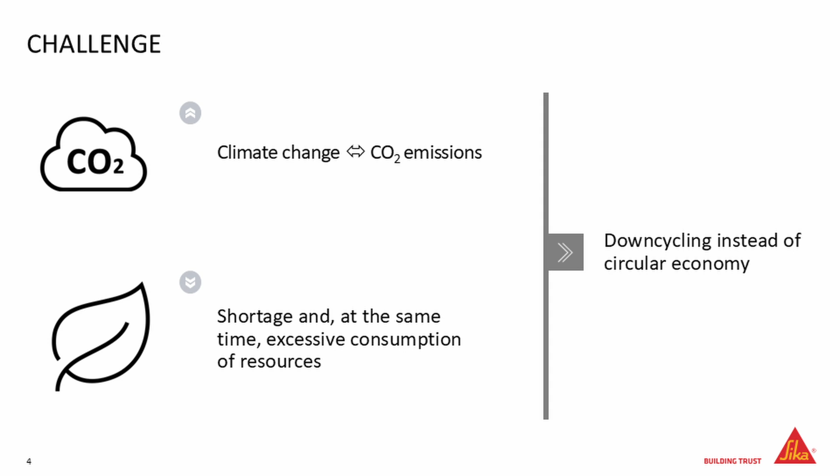When we look at many countries, we see a shortage of materials that we need for concrete, especially high-quality sands and aggregates. On the other hand, when we look at what we do with our concrete structures when we don't need them anymore - we tear them down. But in many countries of the world, we just send that to landfills. I think we could also see that as a raw material and try to think of how we can reuse this waste instead of just treating it as waste. So that's the situation at the moment.

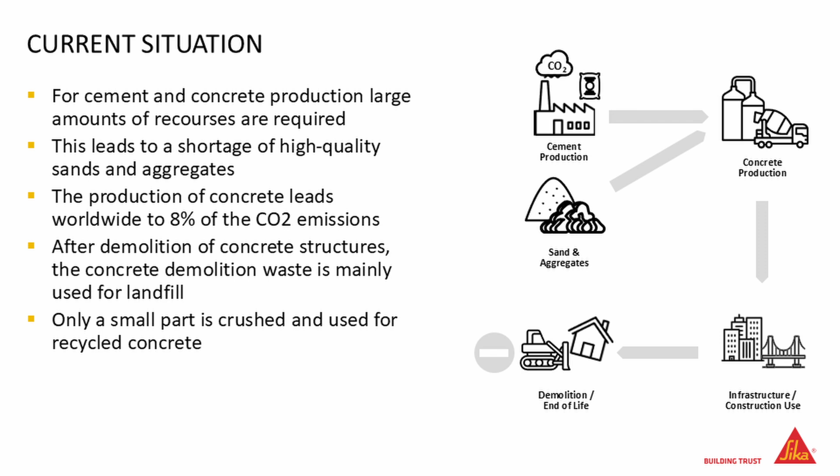The cement production is quite CO2 intensive. That's how it is. Of course, the cement industry is working heavily on reducing that. We need a lot of sand and aggregates for concrete production, but at the end of the use of these buildings, it's really the end of life of this building material that is so CO2 intensive. This is the sand and the aggregates - this is the major part of the concrete.

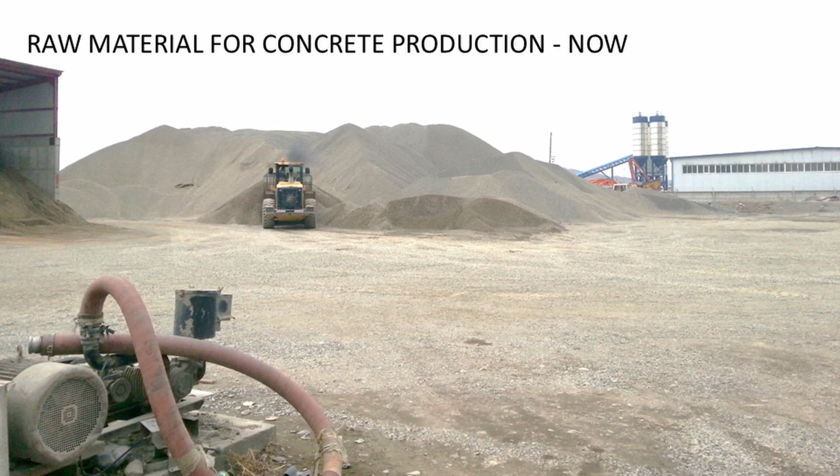Roughly 2 tons per every cubic meter is sand and aggregates. That looks quite nice - in many countries we still have enough resources of that. But when you look at what we need worldwide, you see on the left side the cement production - it's roughly 4.2 billion tons yearly of cement. China has a major part of this, and you see it's now flattening a little bit because of China. On the right side, you see the annual production of aggregates - this is 41 billion metric tons of aggregate needed every year for concrete production.

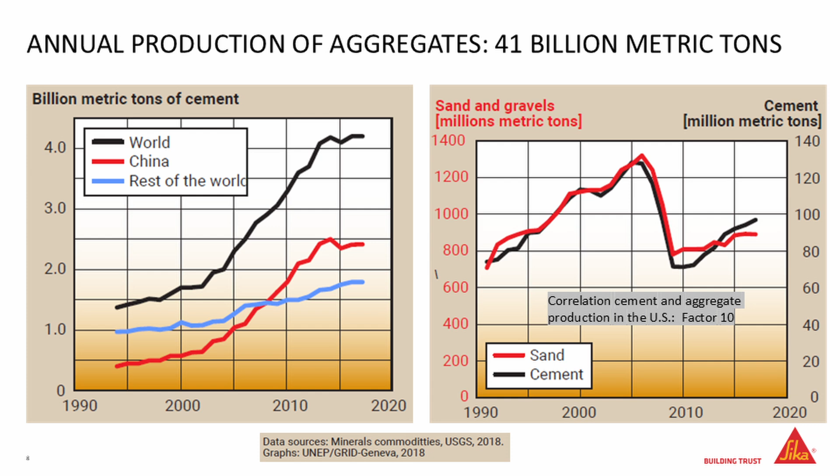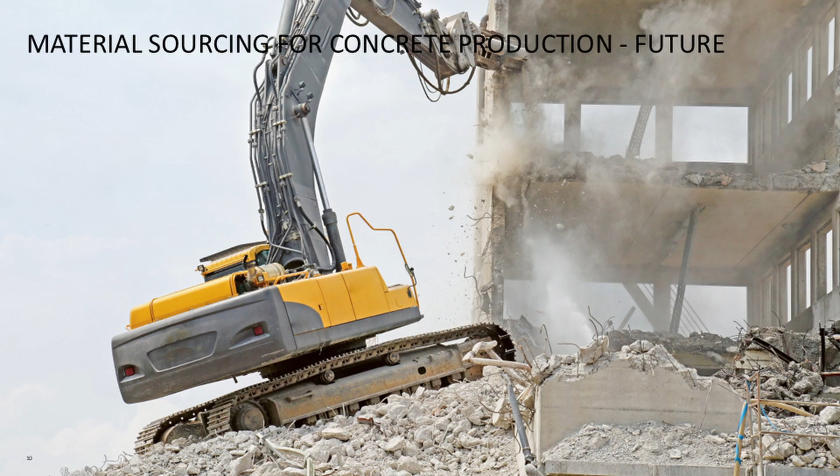Many times we just look at the cement because this is so CO2 intensive in production, but the transport of aggregates is also a very big point. When you Google a little bit, you find a lot of articles about the scarcity of especially high-quality sands. That leads to a lot of transport, because when you don't have the right quality of sand in your country and you need to build a lot of concrete structures, you need to import sand. And what does that mean? A lot of transport, and that's also very CO2 intensive. So what could we do? We could also take a look at what is there and maybe use the old concrete that we don't need anymore as a source for new concrete production.

When you look at the world and try to find out how much concrete demolition waste is available, it's really hard to find figures. You often find figures about CDW, construction demolition waste, and this includes everything: bricks, wood, steel, and concrete. Then you can look at these countries to see how much of this material is really reused, and the figure is quite small. So there is a huge potential.

When you compare the number that's somehow available, 600 million tons of concrete demolition waste, to the 41 billion tons that is required, this is ridiculously small, but I fully believe there is much more of this than we know of. We know a lot of countries have a lot of space, and they use that space for landfill, for dumping old concrete. But I think there is a big potential.

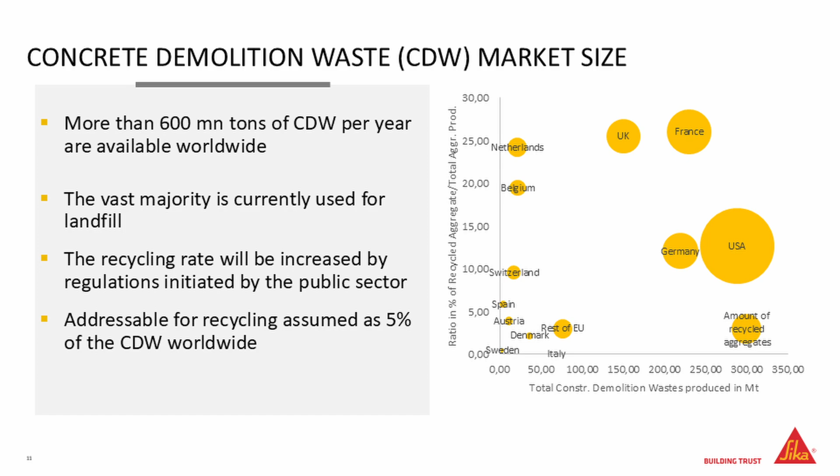For the next slide, I have the kind permission of the city of Zurich to use their materials. So this is how typical construction demolition waste looks like in the city of Zurich.

You see there is a certain part of wood, some metals inside, some glass, some steel, but only a few. The biggest part is the concrete demolition waste, and it's mixed material. This mixed material contains bricks and cementitious material. So the city of Zurich wants to reuse this material, or most of it, again, and this is a big challenge.

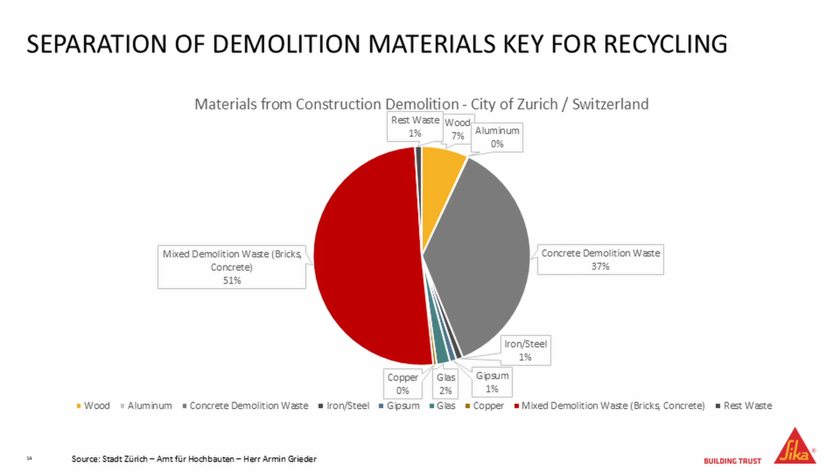But it's still double the target amount, and the target is 2050. It's a long time away, but you need to make the incentives now to get there. And also the CO2 emission per citizen should be reduced to a maximum of 1 ton per person per year. This is, of course, everything, but the construction of the city also has a big impact.

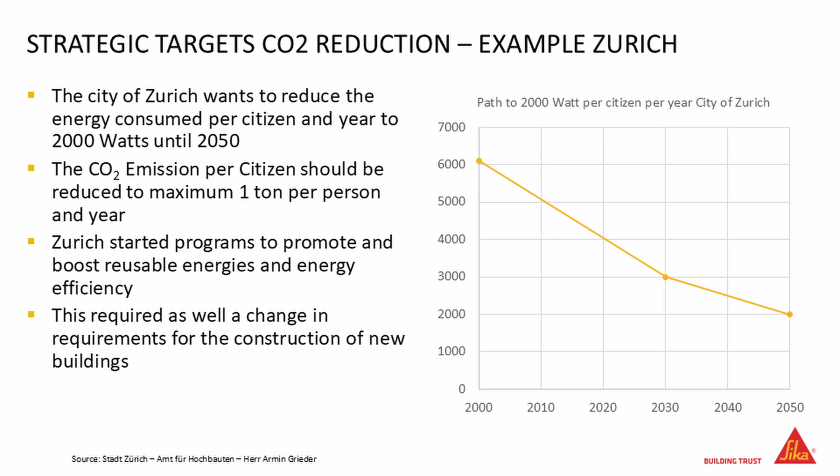Every building the city constructs is part of that CO2 emission, and this needs incentives. So one of these things is to make an incentive for contractors and concrete producers to go in a more circular way. This started already around 2000, when you first need to have standards for this.

Concrete production is highly regulated, and if you want to change from natural aggregates to recycled aggregates, you need a standard for this. You need to somehow implement quality control, and that is why in Switzerland there is this regulation for recycling concrete and also for recycling aggregates. Basically what's in there is regulated applications for concrete using recycled aggregates. By the way, recycled concrete in Switzerland means that at least 25% of the aggregates come from recycled concrete.

So it's not just 5%, it's roughly 500 kilograms per cubic meter of concrete that has to be minimum recycled aggregates. And of course you need to regulate the ingredients and limit certain things, because this can impact the strength and durability of the concrete. Also, when you extend a certain volume fraction of recycled aggregates, that has an impact on the E-modulus of the concrete. So there are different classes. This is very important for all specifiers and engineers, as a basis that is needed.

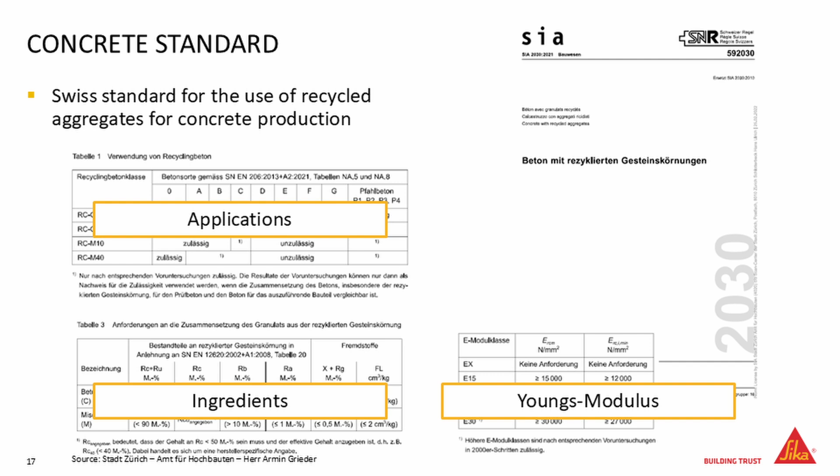Reinforcement is really something I want to emphasize here, because we talk a lot about cement and reducing cement. I think as engineers we also have the responsibility to think about the reinforcement, which reinforcement do we really need, and what do we just put in there because it's good to have it there.

This also leads to a large CO2 footprint, and now we have a lot of sensors available on the market that could monitor the behavior of our structure, and maybe that can also lead to reducing a little bit our safety factors as engineers. But this is just a side remark when I look at that figure.

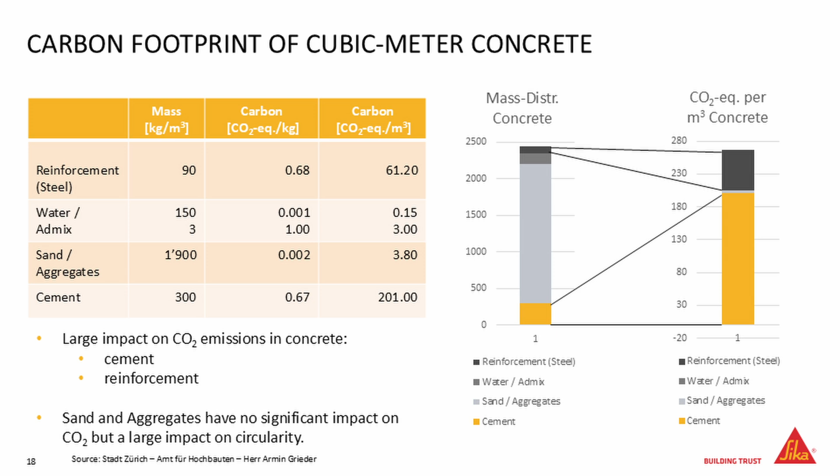So coming back to the city of Zurich, what did they do? They said, okay, we look at the cement, and we now look at alternatives to a pure Portland cement. When we look at the CO2 equivalent of a composite cement, we see we could save a lot of CO2. A CEM 3B has a much lower value in CO2 equivalent per kilogram than a Portland cement, and with that, they could reduce the CO2 footprint per cubic meter of concrete significantly.

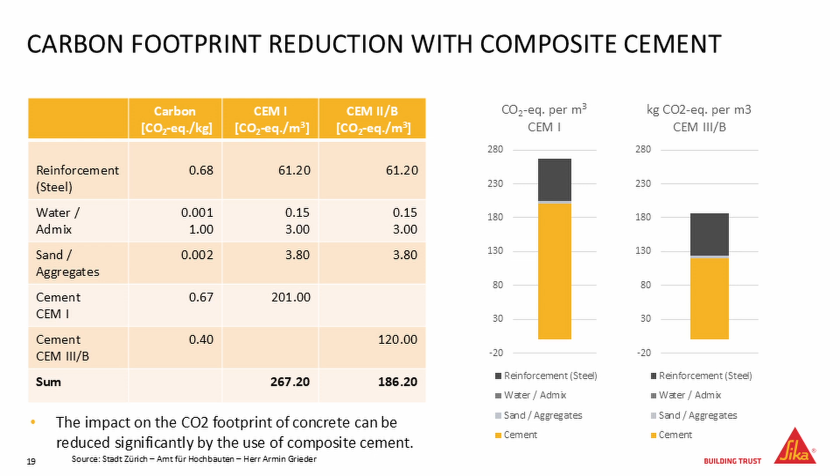So what did they do? Basically, they said we want to tackle these two points, circularity and the CO2 footprint. And how can you do it? You need to specify this. So the city of Zurich said in the year 2002 that all public buildings need to be built with recycling concrete, since 2002. And since 2015, all new public buildings need to be built with recycling concrete containing CEM 3B. So that is a must. And that resulted in some pre-tests done with contractors, with recyclers.

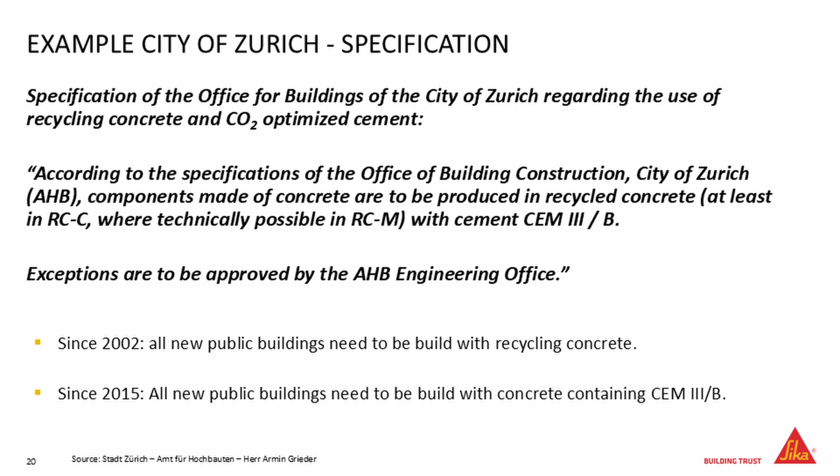Because you need to make sure that you have enough material available when you specify this. It needs to be available. So some recyclers around Zurich needed to be involved, and the contractors and the ready-mix producer to produce a certain quality of that material. But the decision was made very, very quickly, because it was already in 2002, and a short time later the first buildings were produced. For example, this is a public school building in Birch.

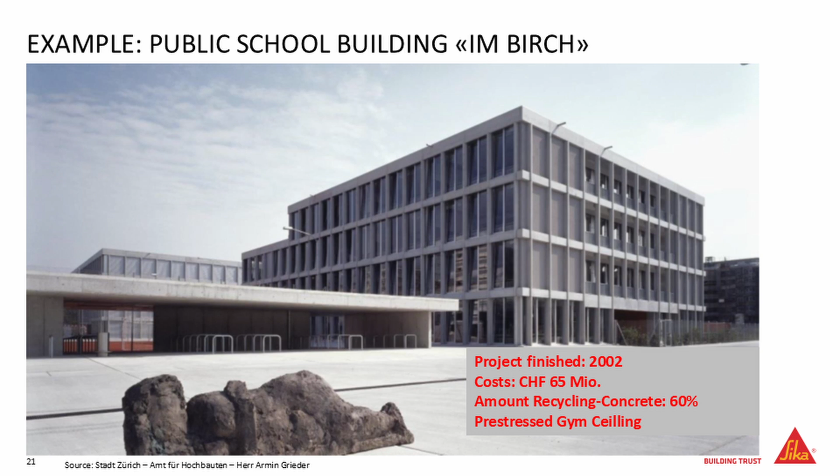It's built in 2002, and the recycling concrete content was already 60%, also used for pre-stressed ceilings there. And it's still standing today. One of my daughters is going into that school, so it's all good. It's all working. There are other examples. A public housing estate in Zurich, built in 2006 with already 75% recycling concrete, also used for earthquake resistance walls. So this is also possible.

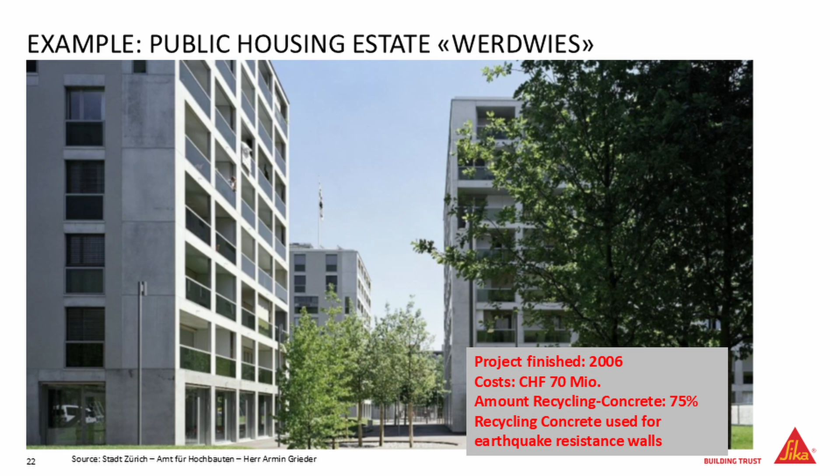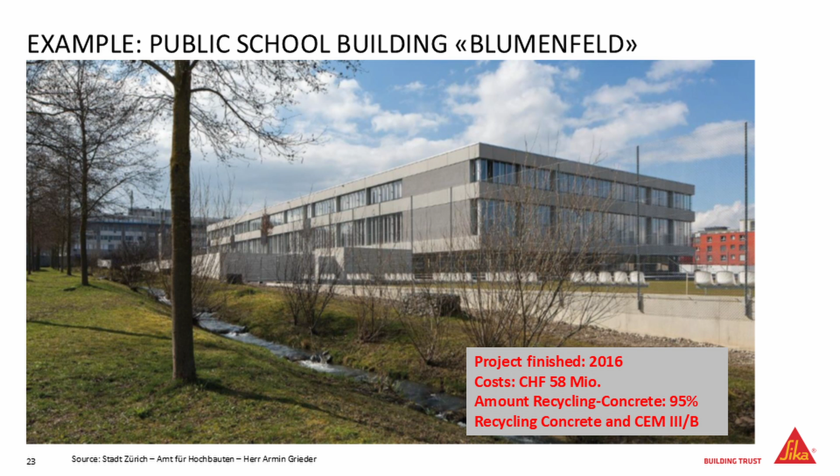And then another public school, also in Zurich, there the amount of recycling concrete is already 95%, containing the blended cement CEM 3B. So that shows that this is possible, and you need to start somewhere. I always say it, walk the talk, and you need some people who just take ownership and do something. I think we have enough good engineers in the world who can judge the risks for such a material, and we have now a certain need to do something.

There are some limitations for some applications. That's why we still have some normal concrete there, because you cannot use recycling concrete for everything. But it's 80-90% used, and 80% of this is used with CEM 3B. So that has a big impact. It's not just a specification, this is really done in Zurich. That resulted in 30,000 tons of CO2 reduction in 2022, which equals 30% of the CO2 released due to building materials. So that has a certain impact.

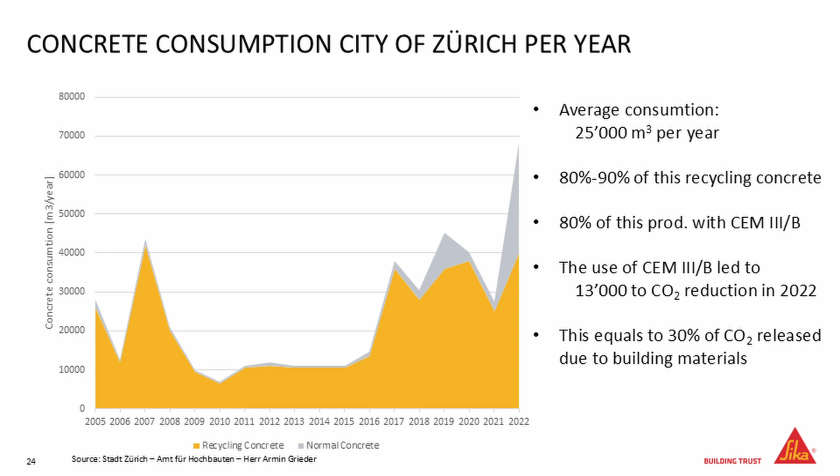So now I want to come to a process, because you still have these peaks with gray material, and this is the standard I showed you. The recycling concrete is not allowed for every application because it has some limitations, so I want to introduce you to a process that eliminates these limitations or disadvantages. One of the disadvantages of the recycling material is that when you crush concrete down to several parts, you can classify this according to size - you can make your sieve curve for the concrete.

That is fine. But the main difference to a normal aggregate is the porosity, because you have an agglomerate of aggregates and cement stone, and the cement stone is highly porous. That means you have a completely different water absorption - the water absorption of this recycling material is by far higher than primary aggregates, and this causes a lot of problems. For example, when you use a lot of this material, you need more water in your concrete. When you put more water in your concrete, you have a strength problem. So to maintain your strength, you need to increase your cement content. That leads to a circular aspect - you can say, okay, with recycling concrete I have a circular concrete, but your CO2 footprint can be slightly higher than a normal concrete. So why should you do it?

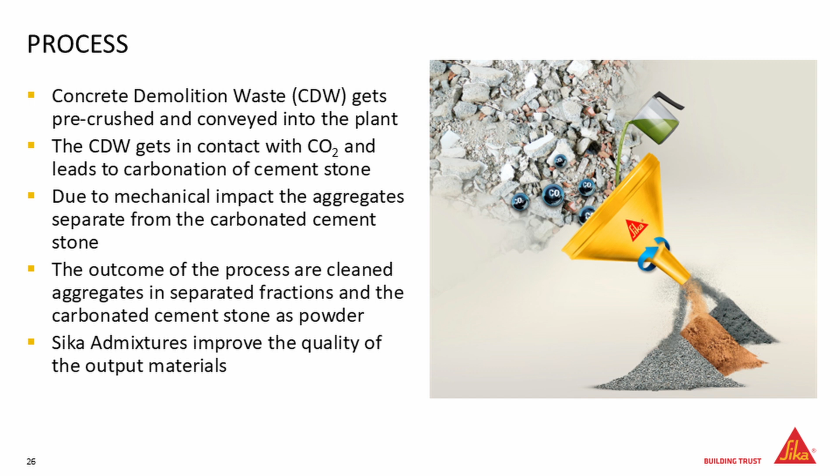So at the end of the process, we have the aggregates, we have the sand fractions, and we have the separated cementitious parts in a powder. And that is basically the outcome of that. And again, why do we do that?

This is because we want to reduce the water absorption of these aggregates. And by reducing the water absorption, by cleaning them, we can open this field much more, so that everybody can use recycling aggregates to produce concrete with a lower CO2 footprint.

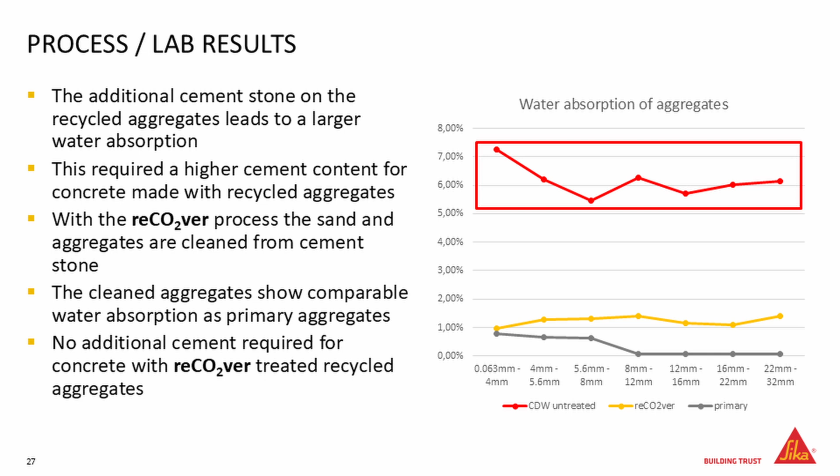That was the idea. And then the idea is that after the demolition, we take the material, we process it through the reCO2ver process, and can bring it back as primary aggregates and reuse it again.

The other story is, you see some more there, that we also can introduce CO2 into the process. And this is the second aspect, the CO2 and reCO2ver.

Because when you grind, or when you put the friction and you have this powder, this can be very fast and easy carbonated. So the CO2 reacts really fast with this powder, so we can bind CO2 in this process as well.

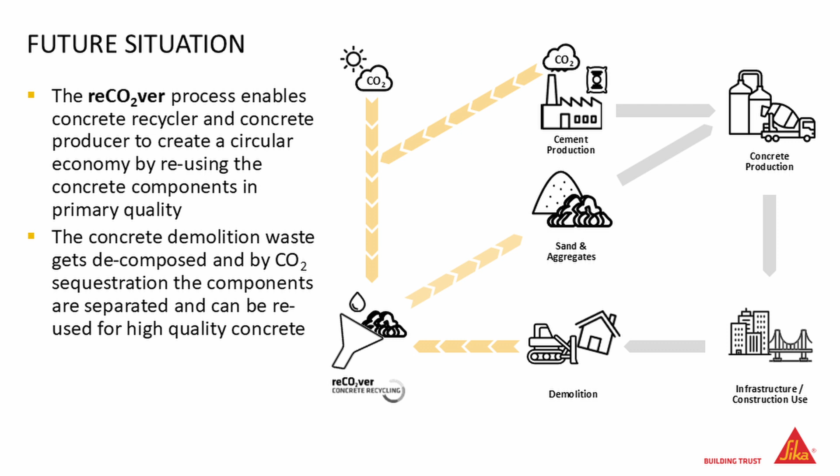So we can have the circularity aspects by cleaning the aggregates from the cementitious parts, and we can have the CO2 sequestration part, which is much, much faster by combining it with a grinding. So basically we can create with this a circular economy of concrete.

We are saving natural resources because we are taking out the aggregates again from the concrete. We can use this process for CO2 sequestration, so bind CO2 into that. And with that, we can reduce the cement fraction of the recycled concrete, and we can also use the powder to partly replace cement.

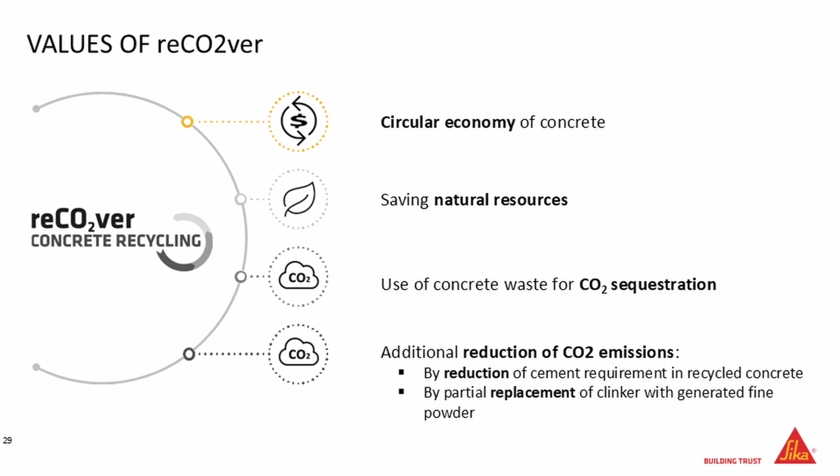So that maybe sounds nice, and you would ask, okay, does it really work? So we ask ourselves, does it really work? We had to show it also on a larger level, not only in the lab, that this works.

We talked to recyclers, and they said we are talking about big amounts, and also one thing was the fluctuation. So if I tear down a normal house that is maybe 80 years old, and the next day I have an infrastructure, an old bridge that's maybe 30 years old, this is not the same concrete. So what do I get?

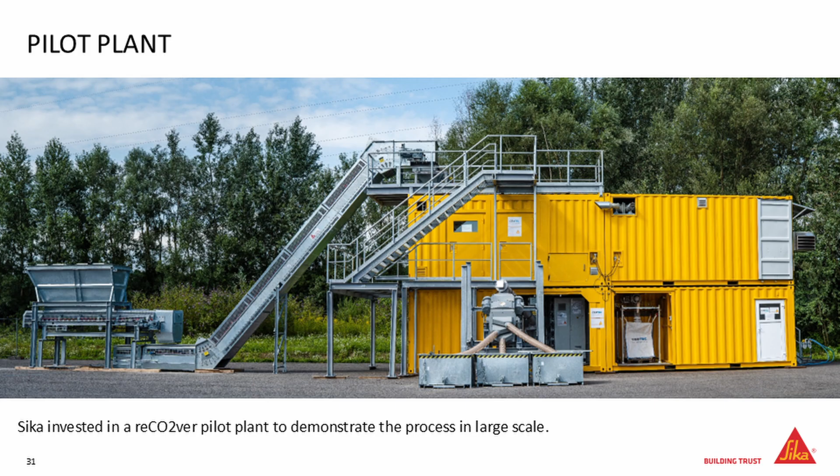And so that was the reason why we installed a pilot plant, and we installed it not at the Sika facilities, but at a recycler, because we really wanted to see how this process behaves with real material, real recycling material. So here is a short video about this pilot plant, so you can see how it works and what are the parts of this plant.

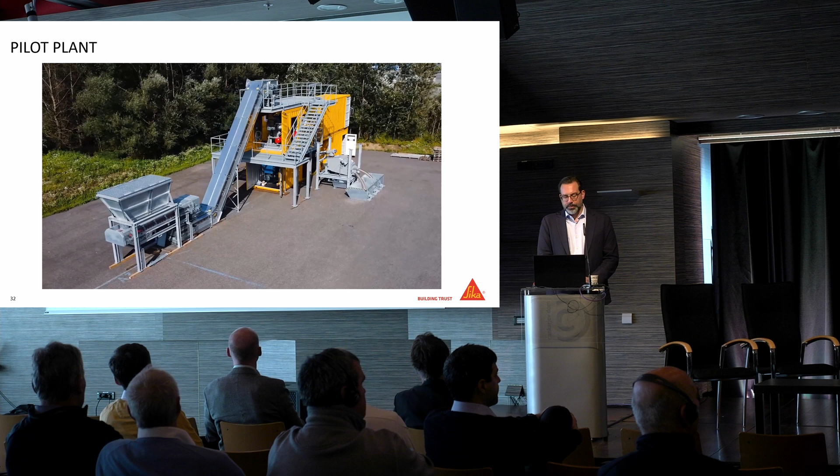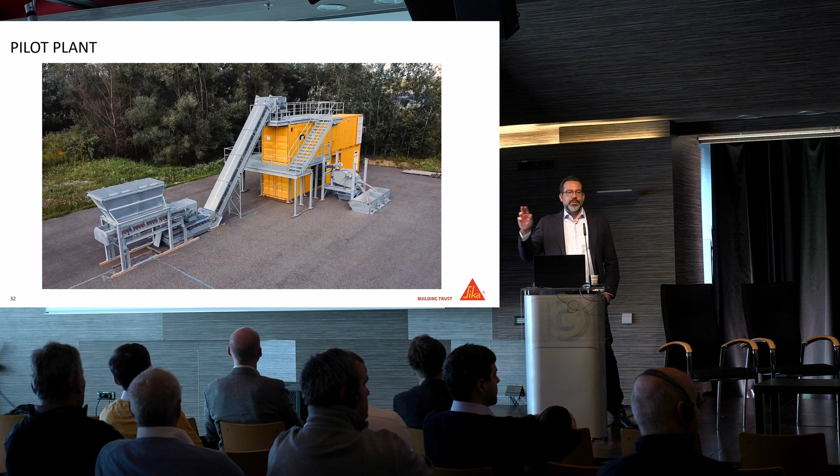So the idea was first that we install a kind of mobile plant, in four shipping containers. And the idea was that we bring it from customer to customer, but in fact we only moved it once, and we saw it's much easier to bring the concrete demolition waste to the plant than the plant to the concrete demolition waste.

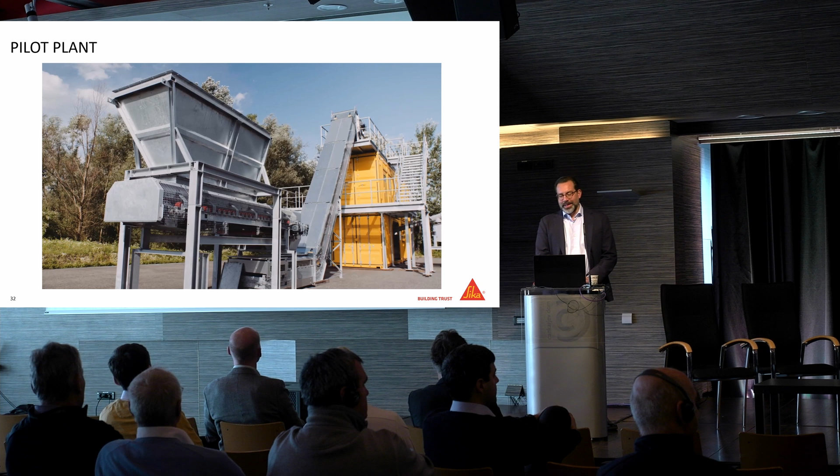So what you see here is the hopper. This is where the material gets filled in. This is an example of pre-crushed concrete demolition waste, you see here it's pre-crushed down to smaller than 40 millimeters.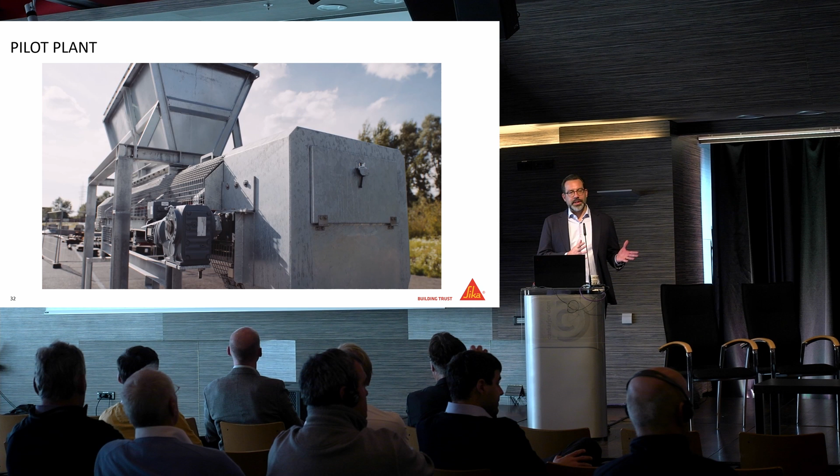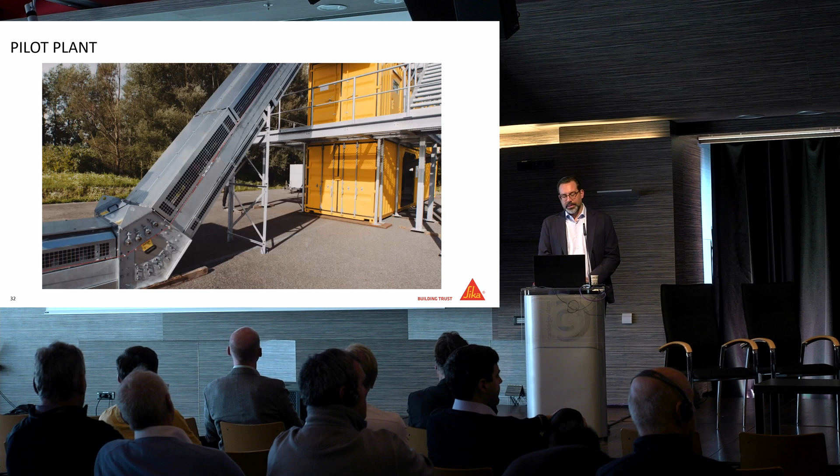This is how it's done in every case because of transportation. They crush it down so you can fill much more into the trucks. Then the material gets transported into the heart of that plant, which is the ball mill.

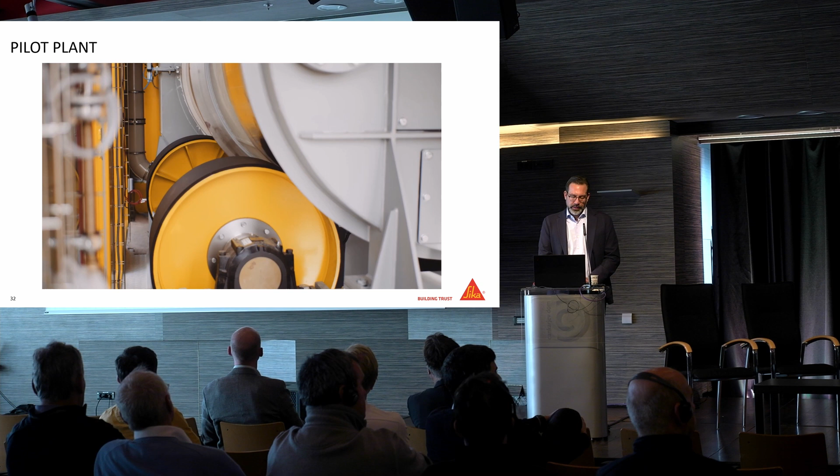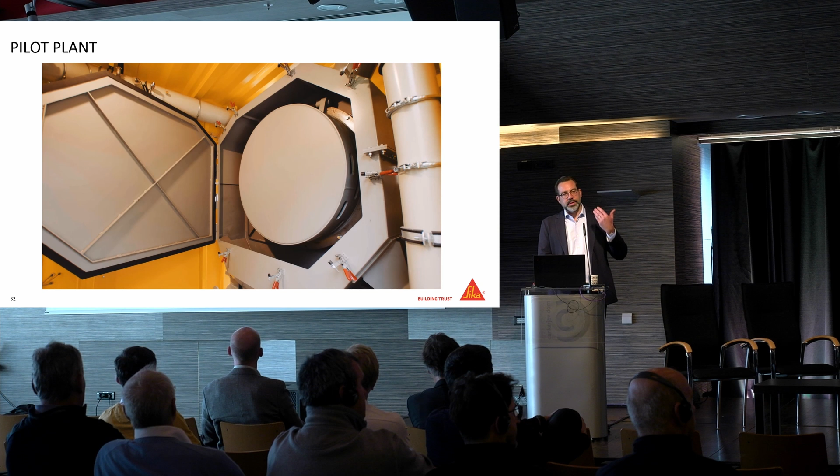Here you see the ball mill, and there the material is separated. At the end of the ball mill, the coarse material falls out, and the finer particles are blown out and taken out with the process air.

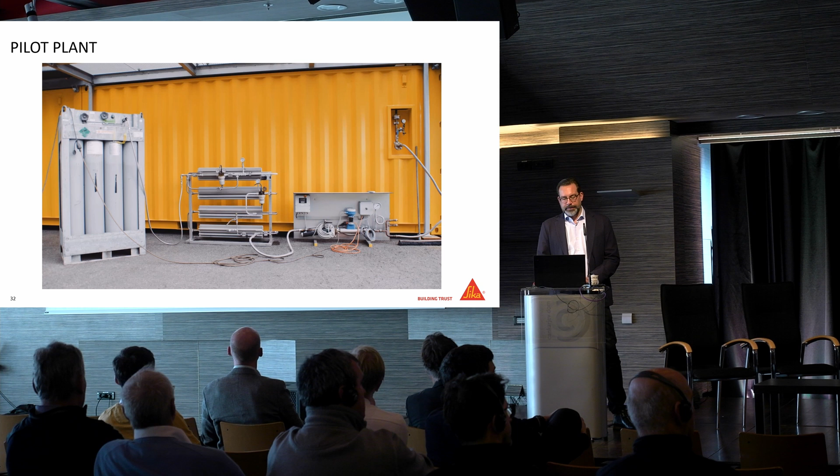Of course, we as admixture producer, we tried several process aids to improve the process, and this is the CO2 that we also supplied to that process, so that it reacts immediately with the powder.

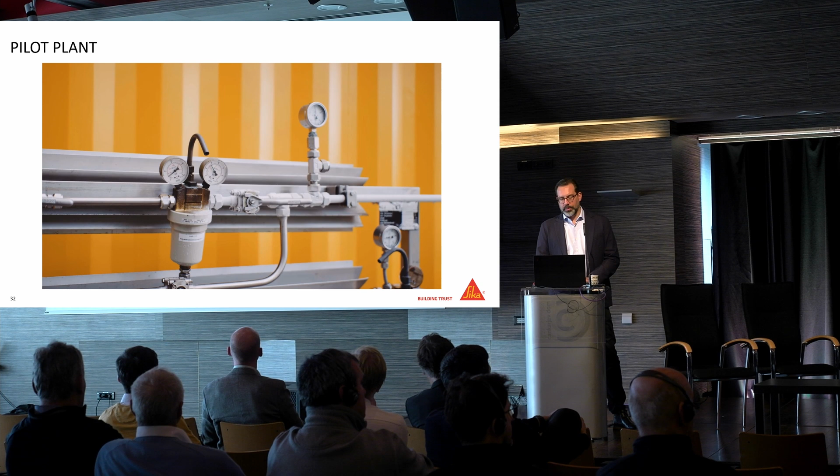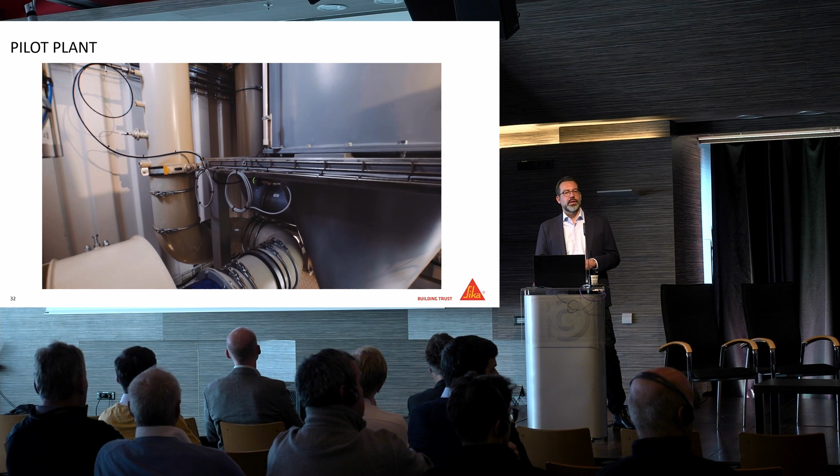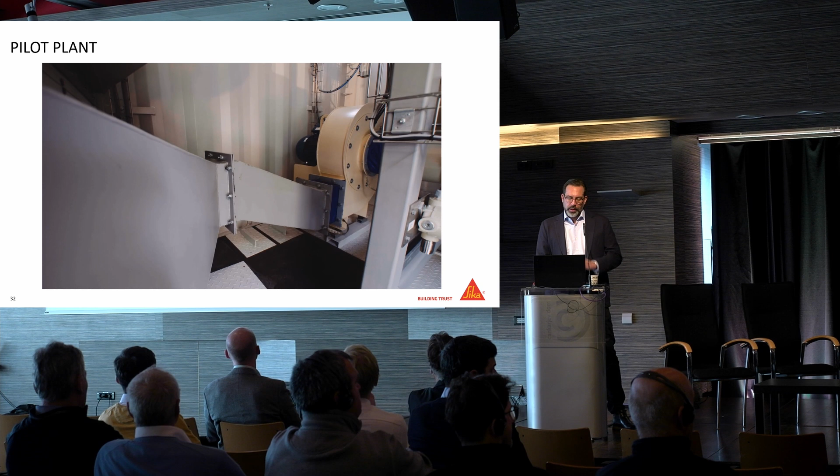As said, the process air has some CO2 inside, so we need to reuse it. We have some filters there that filter out the powder material from the process air, and this is then collected separately. In the pilot plant, we also have a big air conditioning unit, because we wanted to play around with the humidity and the temperature to have some learnings about the process.

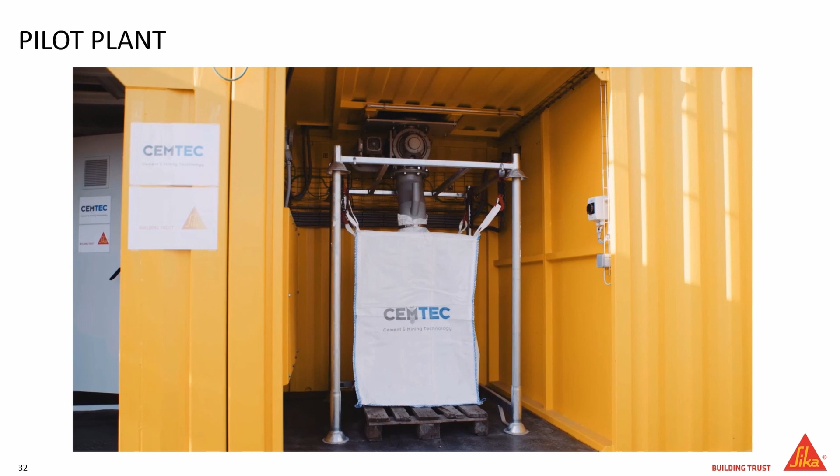At the end of the process, on the right side you see the big bag where we collect the powder material, and on the left side is where the coarse material comes out, and then it's separated into whatever fractions you like.

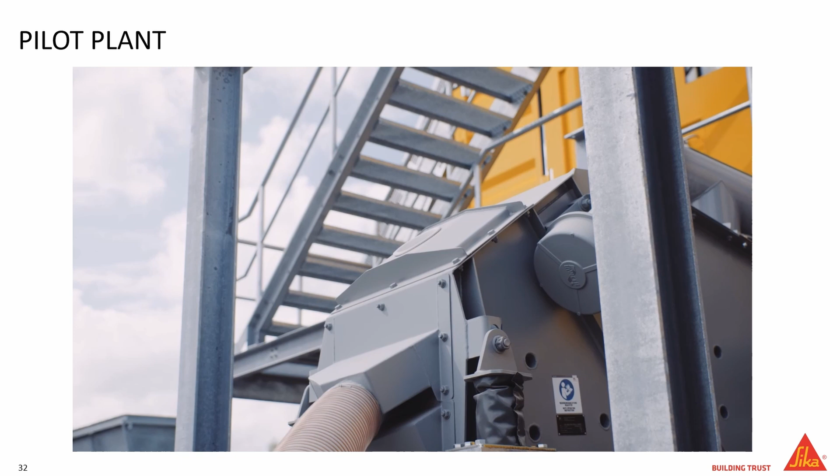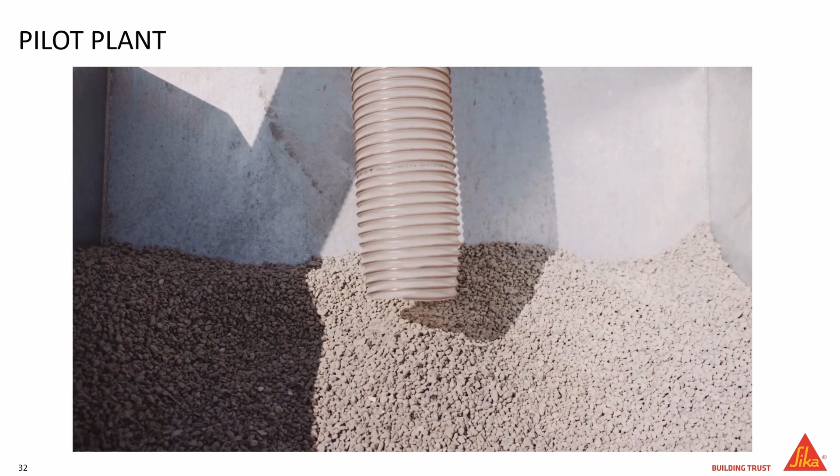Now we do it with Swiss or European fractions. The sand is 0 to 4 millimeters, then 4 to 8 millimeters, 8 to 16, and 16 to 32. But it's a normal sieving flow, you can do whatever you like.

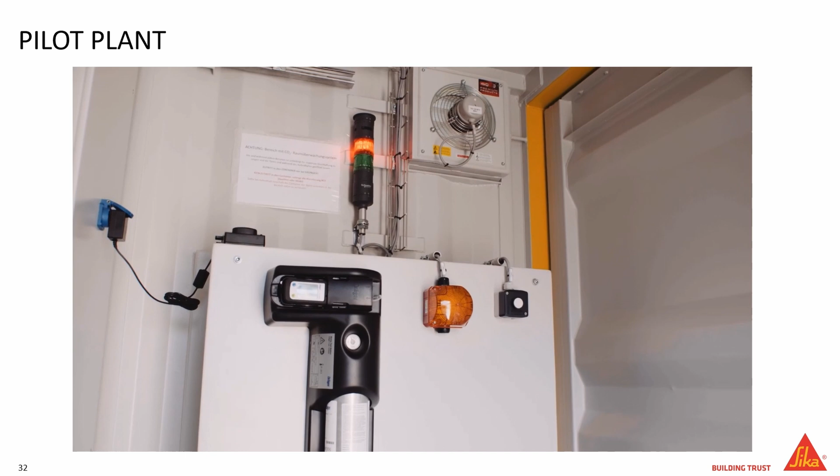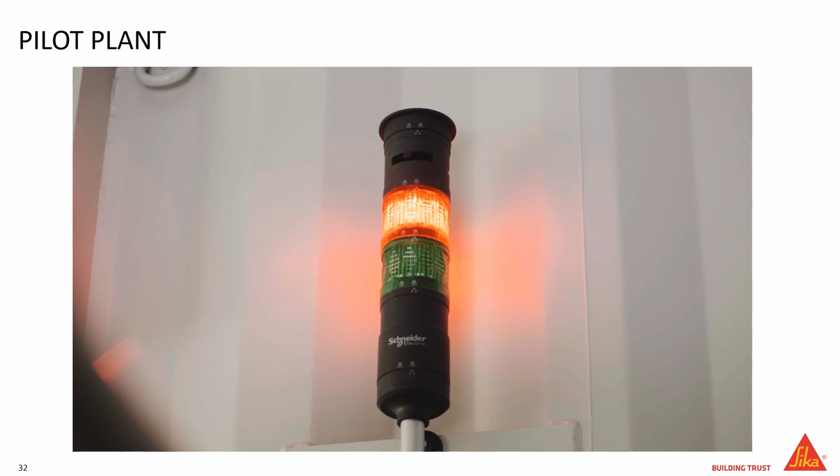So that's basically it. There are of course some security measurements as we are dealing with CO2, that's very clear. But there are also some learnings - we now produce, or we use this plant now for more than 2 years, so we have some experience and some learnings with that.

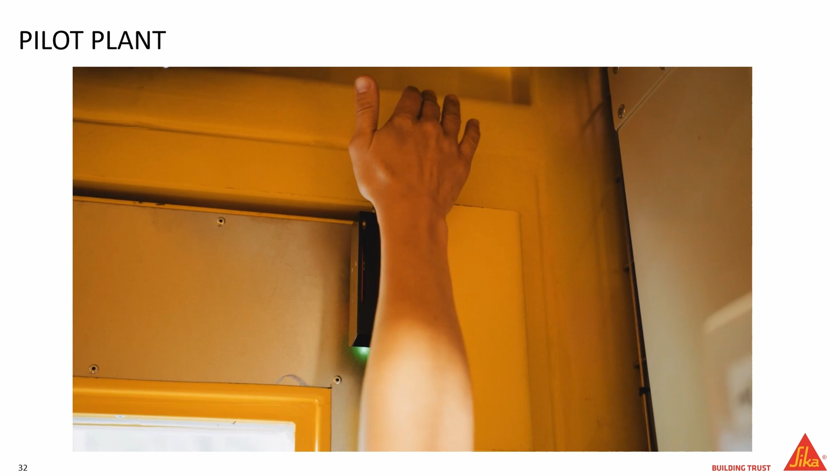Together with a recycler, one learning, for example, is to separate these two processes. Step one is really the mechanical process where we separate the materials - it's just pure friction, and we clean the aggregates and separate the powder. Then step two is optional: we can just take the powder and put the CO2 in contact with it.

Why did we do that separation? Because of several reasons. One reason is that if you work with CO2 in a continuous process - and step one is a continuous process, continuous material in and continuous material out - when you put CO2 inside, you should make it somehow gas tight. But in a continuous process, it's really hard to get it gas tight, I would say impossible. So we also had some CO2 leakages, and CO2 is a high valuable material that you don't want to just leak out. That is a technical aspect.

The second technical aspect is that for the separation of the material, you need a very dry environment, and for the carbonation, you prefer a rather wet environment. So you always need to come to a compromise, which is not good for the separation and not good for the carbonation. So when you separate it, you can focus on each step and have the perfect conditions. Also, the third point is that you are much more flexible, because for the first step, the main thing you need is the concrete demolition waste, and for step two, the main thing you need is CO2. In many cases, you don't have these two materials at the same place.

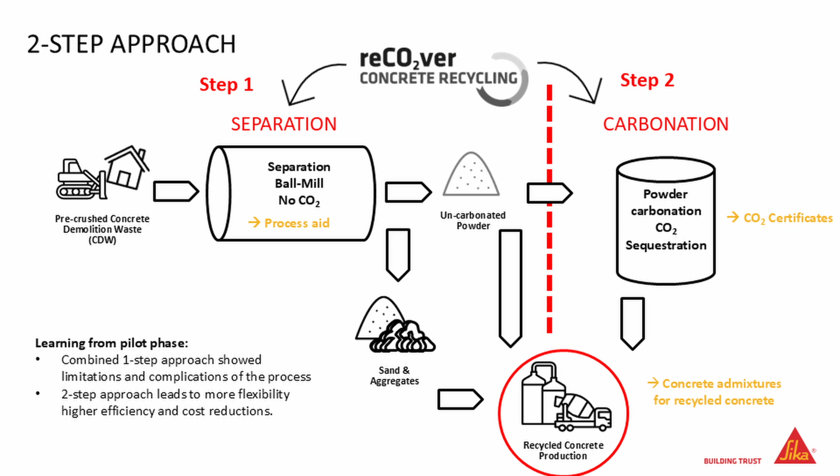So what did we get? I want to show you some results, some pictures to see. On the left side, in the gray area, you see the input material, and for better comparison we sieved it, and maybe you see it best with a 16-32 coarse material. On the left side it's clear you have a lot of cementitious material around the aggregates, and on the right side you see the material how it comes out of the process.

So of course we want to have the lowest water absorption, that is the target. That means we do not want to crush the aggregates, because when you crush them you get rough surfaces which require a higher water demand. So we want to keep the surface area as low as possible. That can also mean we still have some agglomerates, and you see here that we still have some cement stone in between the aggregates, but you see clearly the cleaning effect.

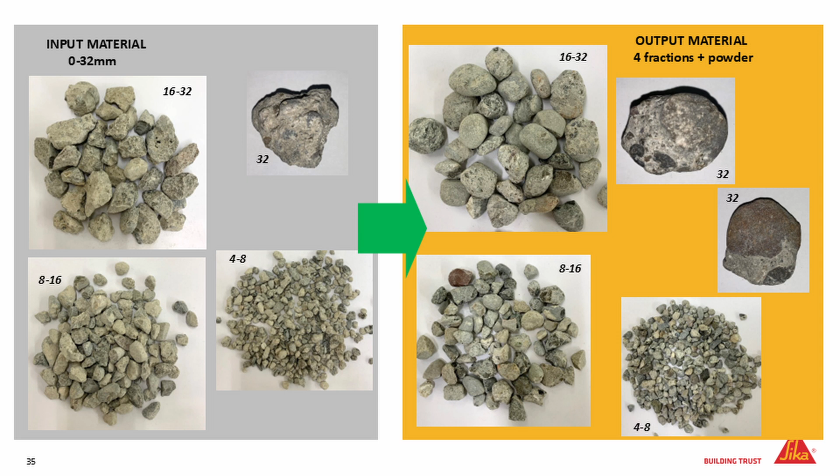What we measured all the time is the water demand. On the top left you see the water demand of the aggregates, from small fractions to large fractions, and the red line is the input material that we measure the water demand of. We basically measure the water absorption of the aggregates after 24 hours. This is what we do: you take the aggregates, dry them, put them into water, surface dry them, and measure the difference in weight. We do that with the input material and with the output material of all batches, and then we get, after 2 years, some average values.

What you can see is that for all the fractions, on average, we could reduce the water absorption by 50 to 60%, so very significantly. And when you look at the values, and that's the feedback we got from concrete producers and contractors, below 4% is somehow manageable, but more than 8%, or between 8 and 10%, that's far too much.

Of course what we do, as shown in the diagrams on the right side, is we change the granulometry. You don't get the same granulometry as you put in, because we have the large aggregates—they are agglomerates of smaller aggregates and the cementitious material. When you separate them, you get a different granulometry, so we get much more fine content. When you look at the bottom right, you see the particle size distribution of the output material, and we get roughly 20% that is powder. Powder is defined as what is transported via the air, and this is roughly smaller than 120 micrometers. Then we get a big fraction—50% is the 0 to 4, the sand fraction—and roughly 30% is coarser aggregates.

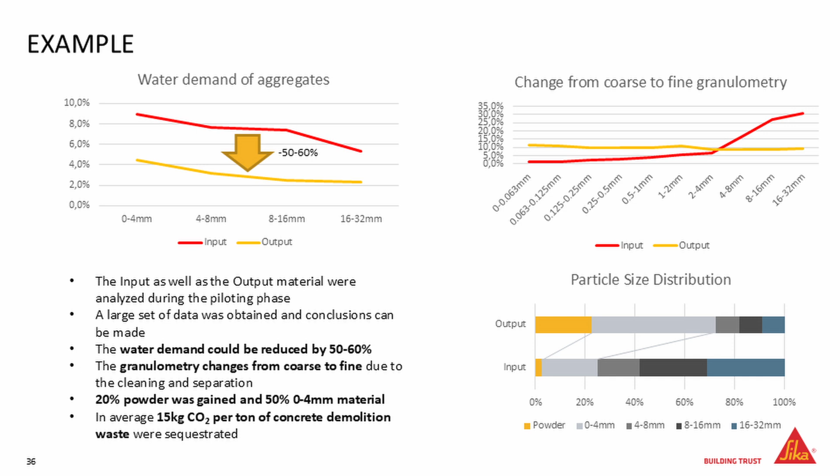Then in the pilot plant we did the combined step 1 and step 2. So we put the CO2 in the process, and there, on average, we could sequestrate 15 kilograms of CO2 per ton of concrete demolition waste during all these trials that we did. That is also an important figure.

Now let's have a look at the powder. Again, there you see the particle size distribution, and you see the majority is below 100 microns. What is also interesting is the chemical composition, because we have a lot of calcium oxide in that powder. That's clear, that's the cement stone. Interesting also is the calcium oxide and silicon oxide—the silicon comes from the aggregates, so you still have some dust of the aggregates from the friction. But the calcium oxide is quite significant, and this could also be a potential source for cement production.

Because basically what you need for producing clinker is a calcium source. What we use as a calcium source is limestone, calcium carbonate, and by heating it up you separate the CO2 from the calcium carbonate, so you come to calcium oxide. Here you have calcium oxide directly as a source, so you don't need to separate the CO2 in the kiln. That separation, the chemical decomposition of the limestone, is roughly 50% of the CO2 output of cement production. So this could also be an interesting use of the powder.

Of course, here we have to discuss the amount of powder that is available—that is another discussion—but this is a possible use for that, next to the use as filler material.

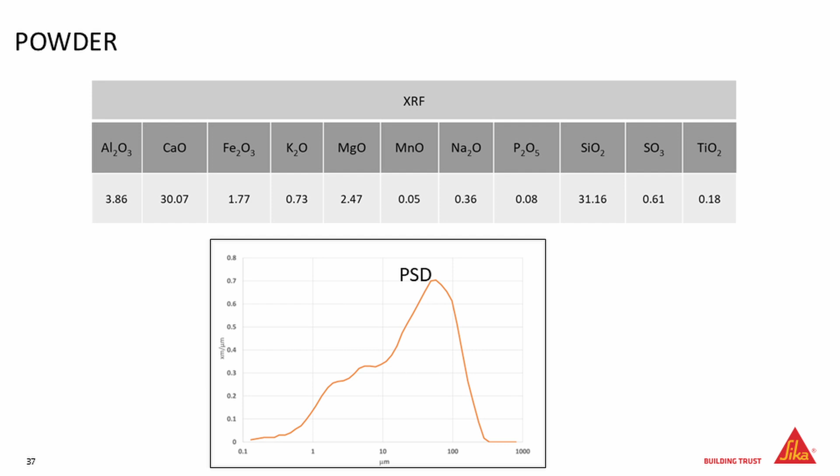That is not so easy in the continuous process. So what we did is basically a thermogravimetric analysis of the powder before sequestration and after sequestration, and there you can nicely see what happens. The calcium hydroxide we can carbonate - you see the small peak disappearing after carbonation, and the calcium carbonates increasing, and also we can carbonate some of the hydrates. There is still potential for carbonating more, but this is how we measure it, and this is a very important step because we are also developing with some partners a methodology for getting CO2 certificates for this, and a very key element is how to measure the CO2 you take in that process.

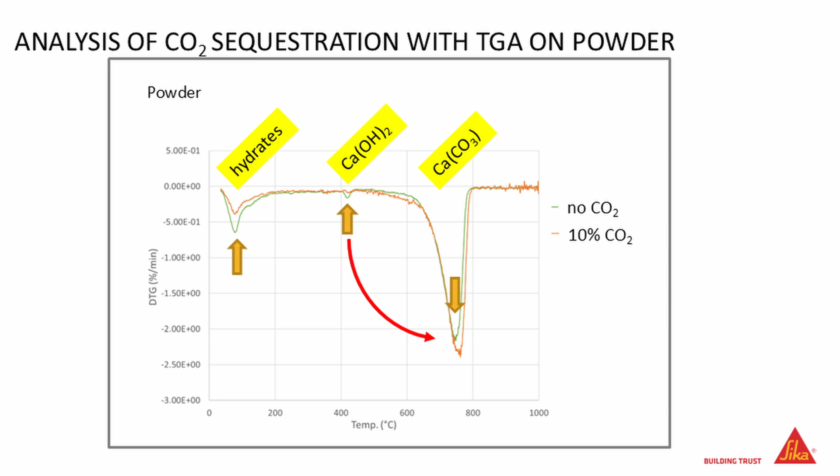So what is the status now? After these learnings from the piloting phase, we always got asked, okay, so what are the costs of such a plant, and what do I need for that? So we partnered with a company called CEMTEC, based in Austria. They are experts in ball mills for the mining and cement industry. They made us an engineering design - we asked them to engineer an upscale plant, 20 tons per hour throughput, and this is basically how it looks like. The heart is still the ball mill, and behind it is the filter unit for filtering out this powder. In the front you see the coarser aggregate fraction, the sieving tower, and the separation into different fractions.

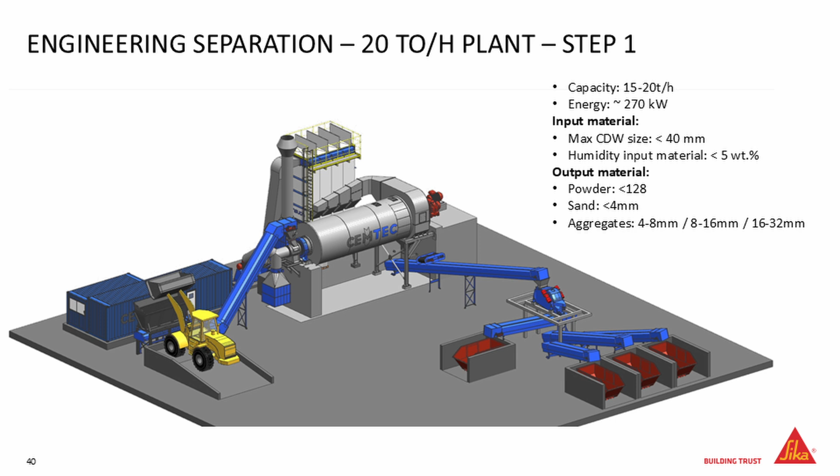And we have a fact sheet for that, so we can now tell you how much energy you need, how much space you need, how much manpower you need, and of course also what the cost is - the investment cost and the operational cost. Because at the end of the day, all of this stays a nice story until there is a business case for somebody to invest in that. That's very clear, so that's what we needed.

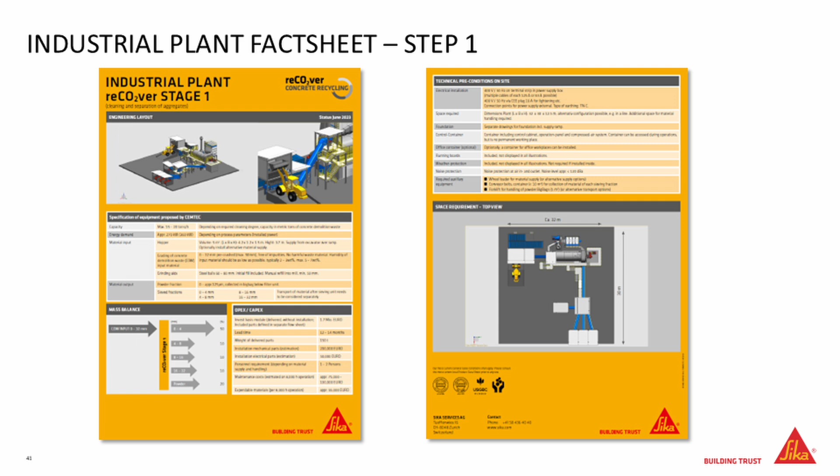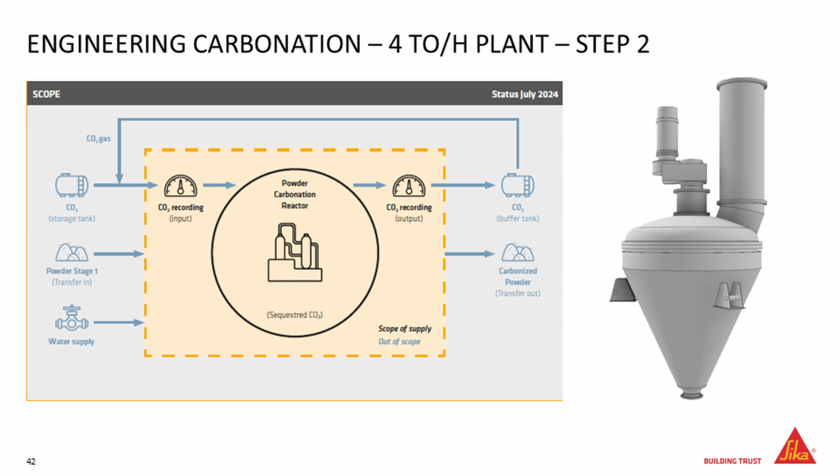So we have it for this 20-ton plant - step 1, which is only the separation, and we also have it for step 2, because we developed a separate step 2 for that. Basically what we do is have a chamber where we put the powder inside and put the CO2 inside and let it react, and then we can much more easily measure the uptake of CO2 by several ways. And also for that step we have a fact sheet with all the things you need, CapEx and OpEx.

That is very important, and that's maybe an important message - this can be a nice opportunity, but it will only be used when there is a business case. At the moment it looks like this: who is paying more for aggregates? Because a recycler or whoever does it has to take the aggregates once more into his hands to clean them, and this needs to be paid. And he gets maybe a material that has 80-90% the same properties as primary material. So who would pay more for a material that still has fewer properties than primary material? That is a big question. The powder is a different story - that can be done maybe in cooperation with a cement producer or a mortar producer or whatever. There could be something there, but for the aggregate, it's really a tough business.

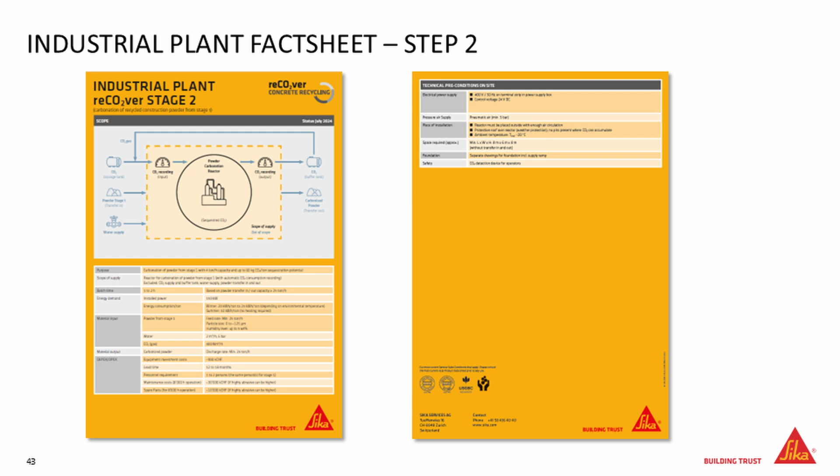But of course we did trials with these materials, just to show you what could be technically possible. So we asked, can we use the aggregates we get out of the reCO2ver process? What we did is a mix design with 300 kilogram cement, water-cement ratio 0.52, and we made the same concrete using 100% primary aggregates, and the same concrete with 100% reCO2ver-treated aggregates. So we are not talking about 25% anymore, we are talking about 100% replacement. Of course, we are an admixture company, so we could adjust the admixture a little bit, but a concrete with 100% recycled concrete without the reCO2ver process is impossible. And that shows this is possible - using reCO2ver, you can replace 100%.

Another aspect we looked at is the powder. What can we do with the powder? More focus on our core business, the admixtures. We took a reference of 330 kilogram cement, water cement ratio of 0.52, and replaced 60 kilogram of the cement with the reCO2ver powder. What happens? You could stay with the same batching water, giving a much higher water cement ratio—workability isn't much of an issue, but strength development suffers, so final strength is reduced. Or you could keep the same water cement ratio, meaning much less batching water, around 140 liters, which makes the concrete quite tough to work with, so you struggle with workability a lot.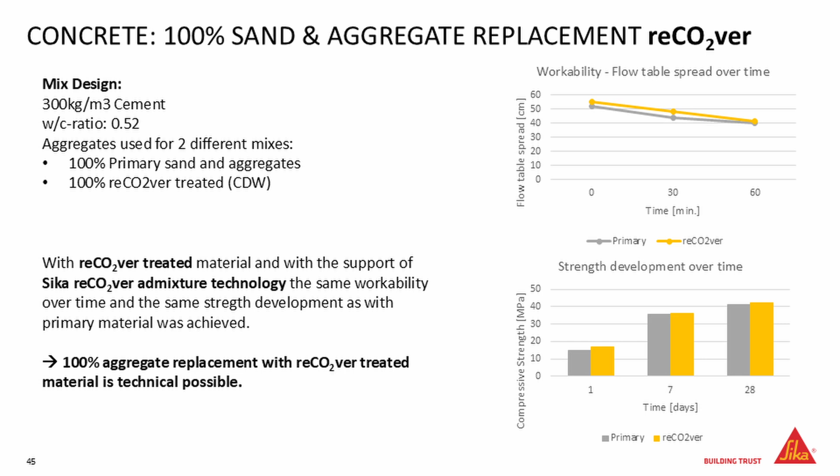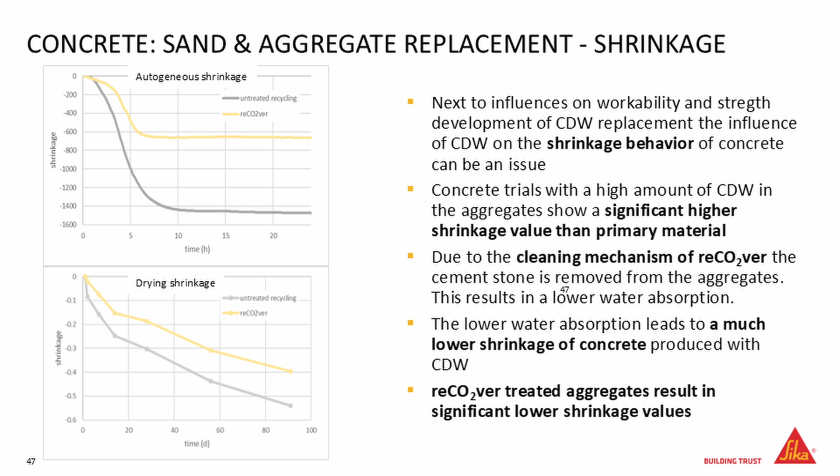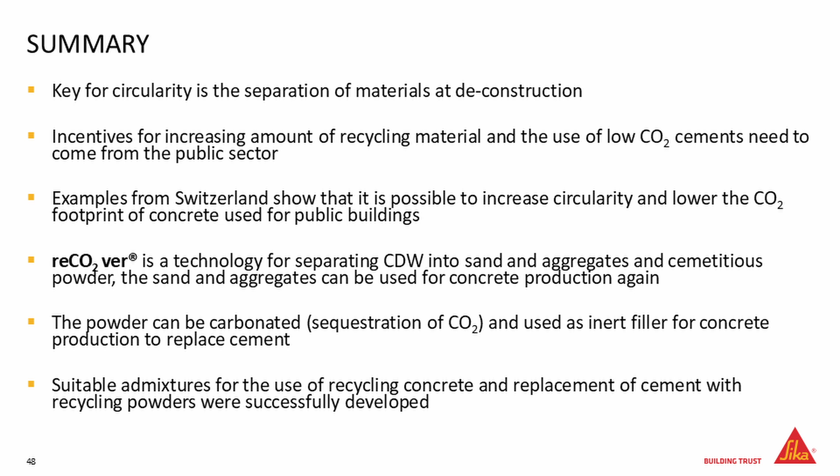What I wanted to show you is that there are opportunities to really increase the circularity of concrete. Some things can be done immediately, like the example of the city of Zurich—they've done it for 20 years, successfully reducing the CO2 footprint of concrete and increasing circularity. The reCO2ver technology goes one step further to increase circularity and reduce the CO2 footprint even more. One key point, which I see more and more across countries and mentioned during my talk, is to separate the materials. When traveling around, I see huge amounts of construction demolition waste that isn't separated. Separation has to begin at the demolition at the construction site—otherwise it's too expensive to separate all the materials so we can reuse them.